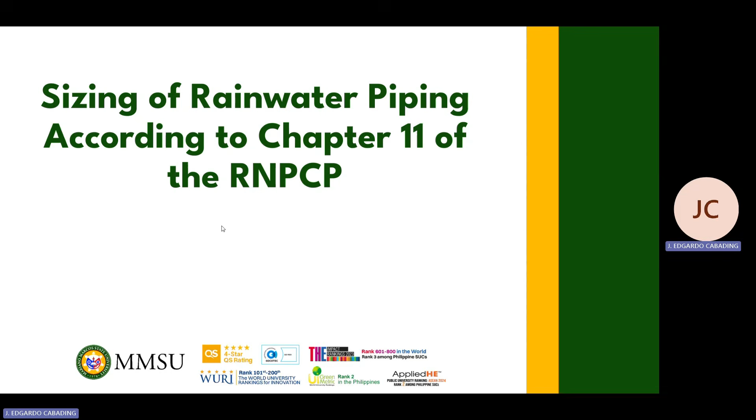So first, we will be sizing our gutters. Bago tayo makapag-size ng gutters, we have to first know the following: una is the horizontal projected roof area, pangalawa yung slope ng ikokonektahan yung gutter, and last is the rainfall intensity in millimeters per hour. And this is an important thing to take note of. Ang makukuha natin dito is the diameter of a semicircular bottom gutter.

Semicircular. Now, if you are to buy commercially available gutters, usually guys complicated yung mga profiles nila. So what you can do is compare the areas ng commercially available gutter at yung semicircular bottom gutter na nasa size natin dito. From that, pwede kang pumili ng size ng commercially available gutter.

Now let us proceed sa steps to determine the size of the gutter. Unang step, ano ba yung maximum horizontal projected roof area? Pero kailangan mo munang i-determine kung anong parte ba ng bubong yung sineserve ng isang gutter o section ng gutter. And this is dependent on the downspout tsaka yung direction ng slope ng gutter. Pero elaborate muna natin yung horizontal projected roof area.

Ang ibig sabihin nito, kumbaga tinitignan lang natin yung roof na parang flat siya. Kung ano man yung nakikita mo dyan, yun na yun. In reality guys, etong mga faces ng roof na to, pa-diagonal sila kasi nga may slope. Pero hindi na natin yan i-consider as such. Kung ano man yung slope ng mga bubong na to, wala na tayong paki doon.

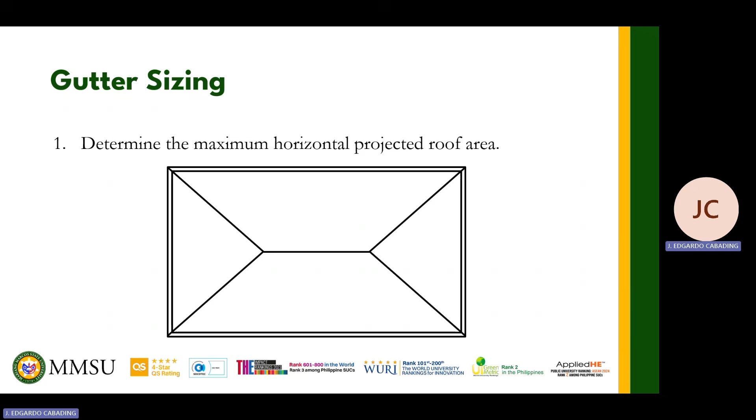Sana nagigets ha. Ngayon, punta naman tayo sa tributary area. Let's say for example, eto yung mga downspouts natin, at sabihin natin gusto kong isize etong section ng gutter na to. O sir, bakit ayan lang yung isa-size mo? O bakit hindi yung buong gutter sa side na yan?

Ganito kasi yan, yung gutter gusto ko siyang i-design in a way na it drains sa magkabilang downspout. Paano natin yan gagawin? E di hatiin natin yung buong gutter, di ba? Tapos sa gitna, dito guys, ayun yung pinakamataas na point ng gutter natin. Tapos mag-i-slope yung mga yan as such papunta sa mga respective downspouts na magde-drain sa kanila.

So dito sa section na to, ang pupunta na lang na tubig ulan is yung tubig ulan na nanggagaling dito. Okay? O therefore, ayan na yung tributary area natin. Tapos pwede mo nang kunin yung horizontal projected area niyan.

Now you have to do this guys for all sections of gutter. When we design, let's say katulad ng bubong na to yung dinedesign natin, wherein connected yung mga gutters natin, what we want to do is just get the largest size of gutter, and ayun na yung gagamitin natin for all gutter sections. Kahit na sa ibang section ng gutter na to, mas maliit yung nire-require niya. This is for ease of installation kasi.

Okay guys, sabi ko kanina, you have to consider every section of gutter, then get the tributary area for each. Then we will determine the maximum as stated sa step, yun kasi yung magbibigay ng pinakamalaking size ng gutter, and ayun na yung i-consider natin for the design.

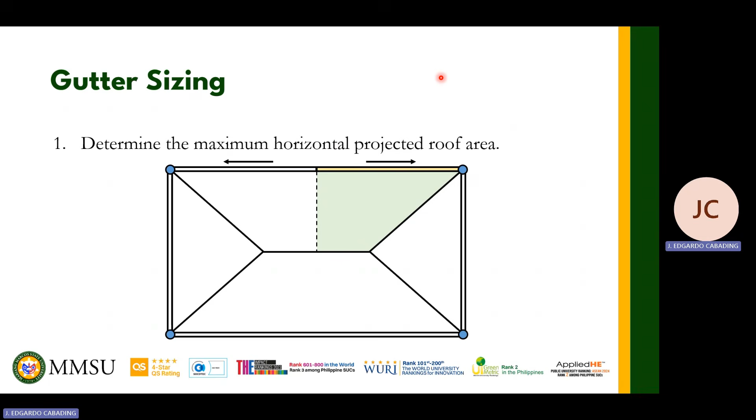So next is, i-determine natin yung rainfall intensity sa location ng structure, and you can acquire this data from PAGASA. Again guys, this should be in millimeters per hour. Ang sabi sa code, pagka daw yung structure is located in Manila tsaka mga karatig lugar, so you can use daw an intensity of 102 millimeters per hour for the design.

Sunod naman is the slope of the gutter. Ano yung i-consider mong slope pag kinabit na yung gutter? So we have here 4 slopes from 0.5 to 4%. Ito kasing apat na to guys, meron silang corresponding tables na gagamitin natin for sizing.

O sir, paano kung hindi exactly yung mga yan yung i-consider naming slope? Let's say yung gusto nyong slope is 1.5%, eh wala naman yan dyan, di ba?

Pero you still have to choose kasi which table to use based on these 4 slopes. So anong pipiliin mo pag 1.5%? Dapat sa 1% ka.

Okay guys, pababa ka dapat kasi that is the slope that will give you the safer size. Let me explain. Pag mas mataas yung slope natin, mas steep yung gutter, di ba? At pag mas steep yung gutter, mas mabilis yung flow ng tubig towards the downspout. Ibig sabihin, madaling mabakantehan yung gutter, at kaya niyang mag-receive ulit ng tubig. Since madali siyang mabakantehan, hindi mo kailangang lakihan yung size ng gutter.

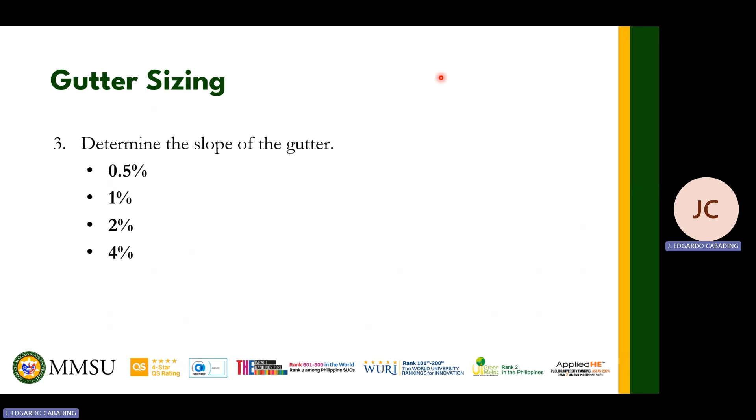So after niyan, pwede na tayong mag-size. Pwede tayong gumamit ng equations na to, and depende yung equations natin sa kung ano yung slope natin. When we size, we always choose the closest, not round up. So sa case na gagamitin mo itong equations na to, you will be choosing the closest size relative to the value na na-solve mo.

Or we can use the tables given here. Si table 11-3 and table 11-5, parang magkamukha lang yan. Check niyo na lang sa code, tapos verify niyo. Then, when we use the tables, we will not be rounding up. Hindi tayo pipili ng value na mas mataas sa kung ano yung meron tayo. Instead, we will be looking at the closest horizontal projected roof area value sa table relative sa horizontal projected roof area from the structure.

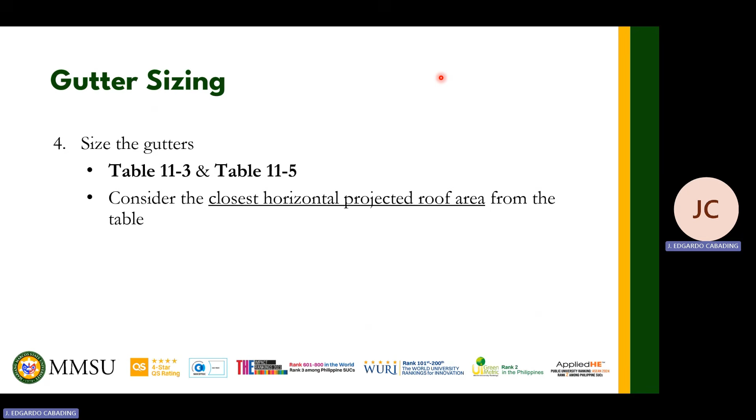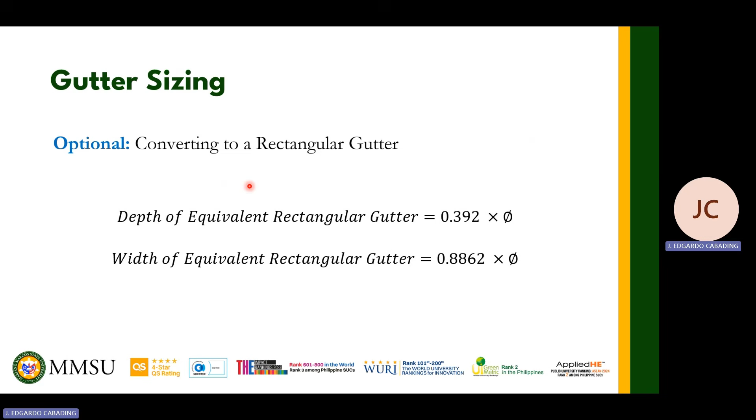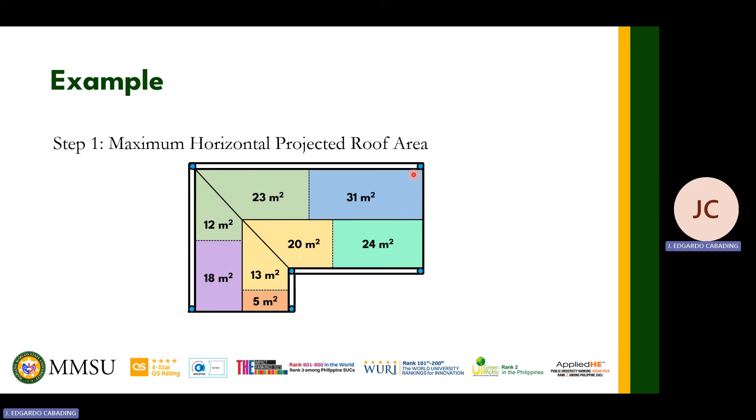Next is the rainfall intensity. According to the problem, the structure is located in Manila, therefore our rainfall intensity is 102 millimeters per hour. And then the slope of the gutter is 0.5%, which is also mentioned in the problem.

After that, we can now size our gutter, so we can get the diameter of the semicircular base gutter. Since our slope is 0.5%, we look at the table for the 0.5% slope. First, we pick the column to use. Since our rainfall intensity is 102, we use this column. And since our max horizontal projected roof area is 31 square meters, we use 33.4, since that's the closest.

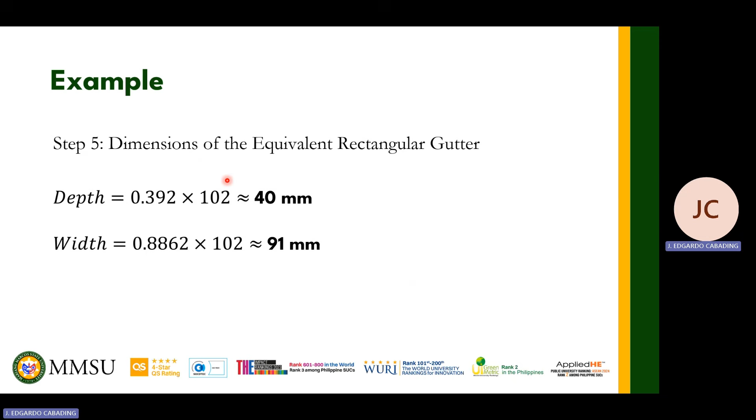Next, let's determine the dimensions of our rectangular gutter, since according to the problem, a rectangular gutter will be installed. To do that, we'll use our equations to solve for the width and depth. We round up so that the design is more conservative.

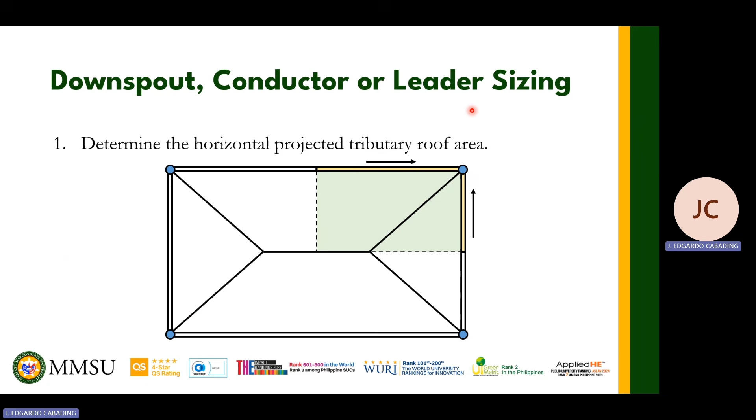Step 1: we determine the horizontal projected tributary roof area served by our downspouts. Like before, let's say these are our downspouts, and these sections of the gutter will drain to this downspout. So what part of the roof is served by the downspout? That's it, and from there you can get the horizontal projected roof area.

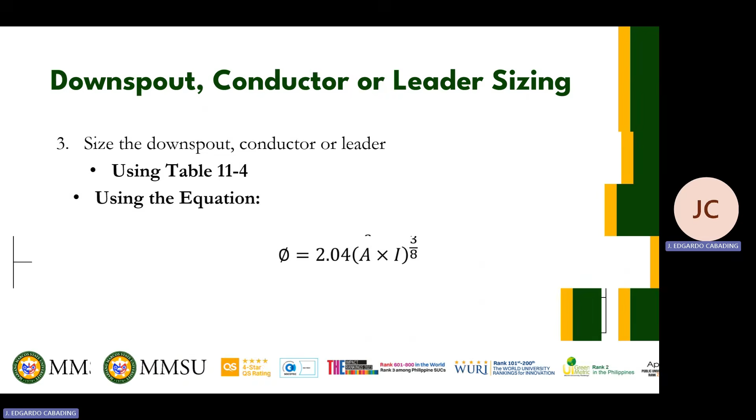Next is the rainfall intensity, similar to before. After that, we can size it using Table 11-4 or the given equation. We pick the closest value. This time we have 25 millimeters per hour rainfall intensity. If your rainfall intensity isn't in the table, do what we did before: multiply the roof area by 2, then divide by the rainfall intensity in inches per hour. Again, we'll look at 51 millimeters per hour. Let's answer the example.

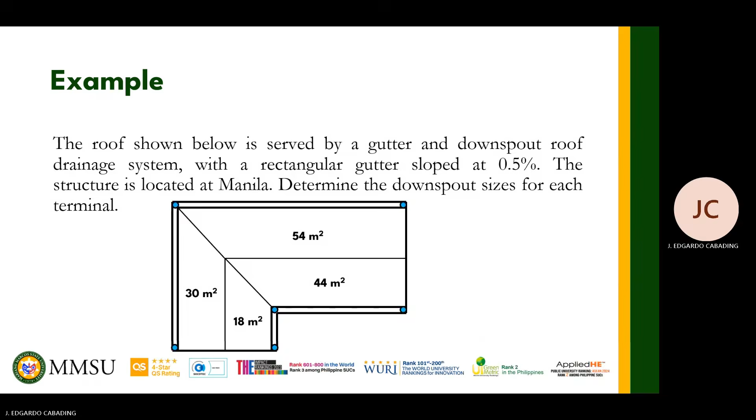For downspout sizing, you can size each downspout individually based on demand, but in practice you can also consider the largest downspout size and use that for all of them. The advantage is that since they're all the same, it reduces confusion for installers and helps with ease and convenience of installation. If you size individually, of course you save more since you're not oversizing everything. So for this example, let's just consider the downspout with the largest tributary area.

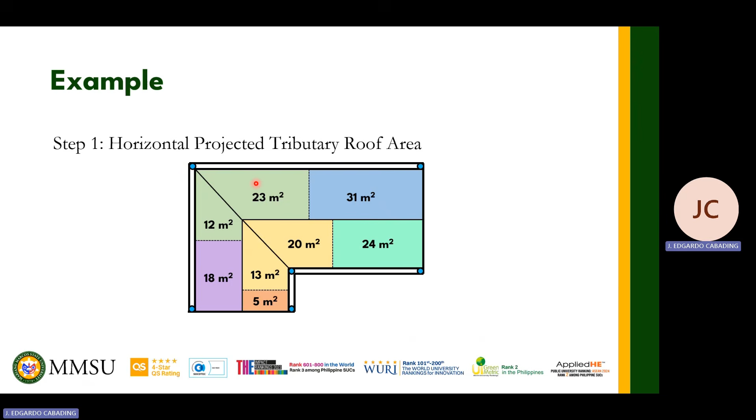Our rainfall intensity is 102 millimeters per hour from the problem, since the location is Manila. Now we can size the downspout using Table 11-4. Our rainfall intensity is 102, so we look at this column - wait, this column. Our area is 35, so we go to 101 since that's the closest value. We follow its row until we reach the size. So the size we get is 51 millimeters.

Let's proceed to our roof drain system. First let's size the roof drain. Similar to the downspout earlier, this is the preliminary information we need to size our roof drains. First step: we determine the horizontal projected tributary roof area.

Same as before, nothing new - you just have to ask yourself what area of the roof or roof deck drains into each roof drain. This depends on the design flow of water. For example, let's say we have a roof deck here, and we'll install 2 roof drains to serve this roof. As for the design flow of water collected there, we want the roof deck to drain equally on both roof drains. So this is the tributary area for the roof drain on the left, and this is for the roof drain on the right.

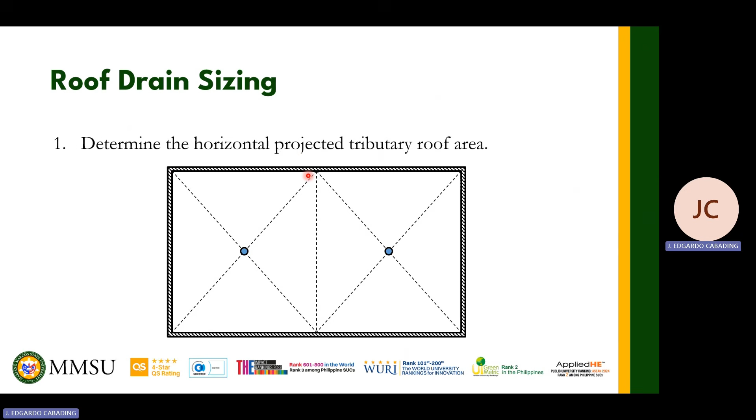We still need the rainfall intensity, same as before. After that, we can now size the roof drain. We just look at Table 11-4, or we can use this equation. This table we showed earlier - it's the same table we use for both the roof drain and the downspout.

So how about our vertical rainwater pipe? Dito, kasama na dito lahat-lahat ng natin vertical rainwater pipes, okay? Whether that may be the downspout na nasa labas or the leader na concealed sa loob. Basta ito yung vertical storm drain na pinagpapasahan ni roof drain ng kinokolekta niyang tubig ulan, okay?

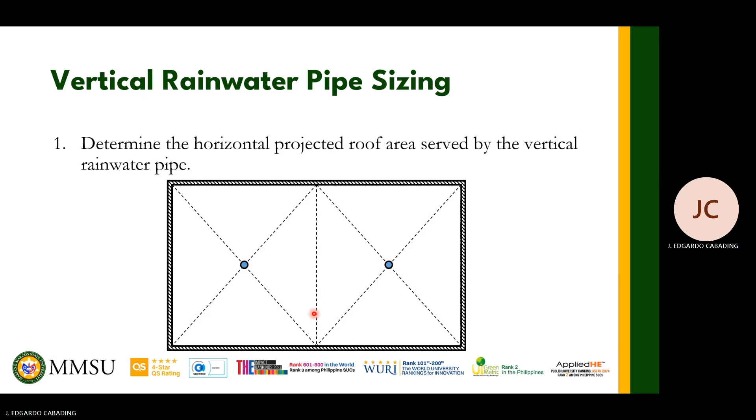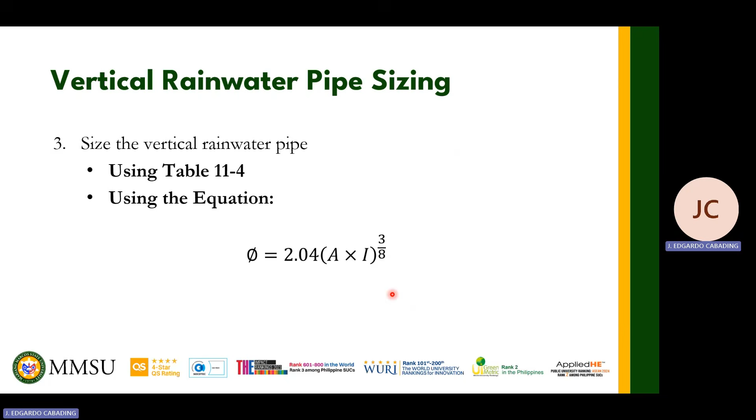Okay guys? Next, kailangan natin ng rainfall intensity, madali na lang yan. Then after that, we can now size our pipe using table 11-4 or this equation. Again, this table ay yung table lang din na pinakita ko kanina sa may downspout tsaka roof drain sizing. Pare-parehas lang sila ng table na gagamitin.

Okay guys? Last na isa-size natin is the horizontal rainwater piping. So yung dalawang to, di yan mawawala sa mga kakailanganin natin, no? In addition to these two, kailangan din natin ng slope ng horizontal rainwater pipe natin, katulad dun sa may gutter. So unang step natin guys is to determine the horizontal projected roof area served by the horizontal rainwater pipe.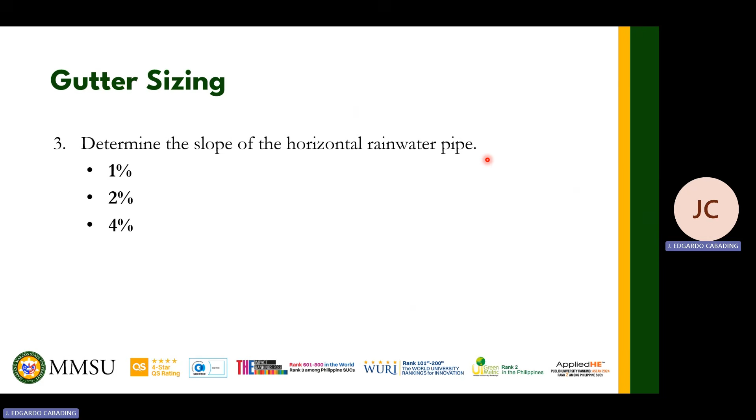And again, if in the case na yung slope nyo is not among these three, sabihin natin in between any of these, mas mababa tayo na slope ha. Okay guys? Again if 1.5% for example yung slope nyo, dapat sa 1% slope tayo. Ayun yung gagamitin dapat natin for the design. Nagigets ha? After that, we can now size the horizontal rainwater pipe, so you can use these equations depende sa slope na i-consider.

Now, let us solve a problem. So size naman tayo guys ng roof drain system. Sabi dito, a structure is served by a roof drain system. Based on the provided roofing plan and diagram, and considering a rainfall intensity of 127 millimeters per hour, i-determine natin yung sizes for the roof drains, the horizontal rainwater pipes, and vertical rainwater pipes. Lahat daw ng horizontal rainwater pipe guys is sloped at 2%.

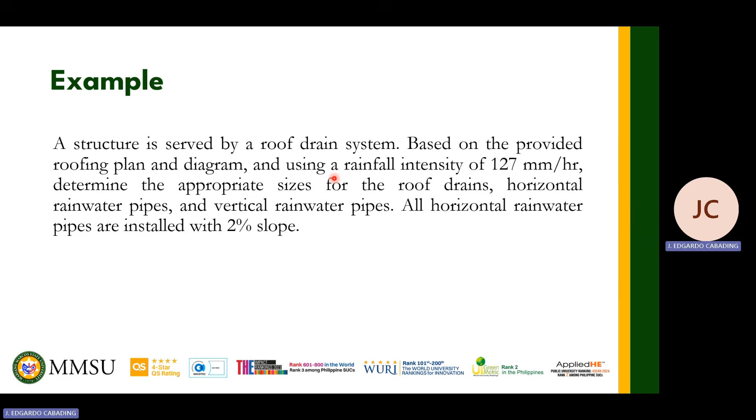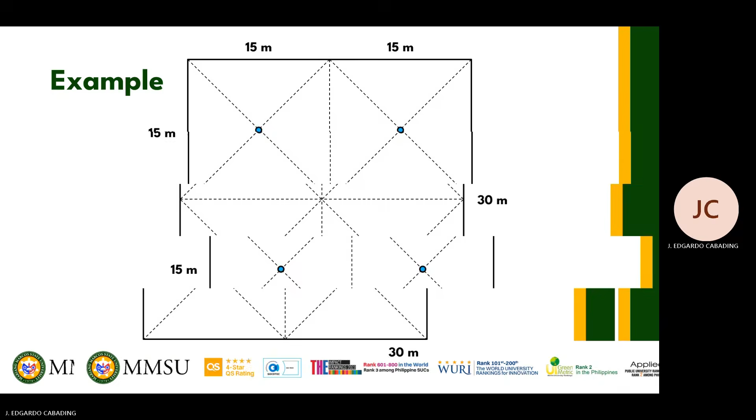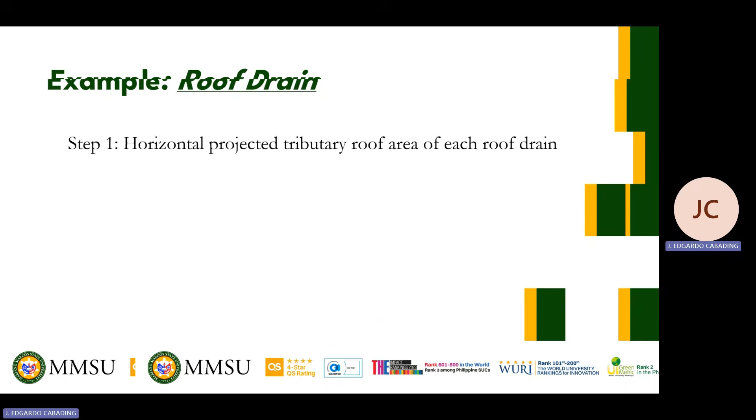So unang step guys, kunin natin yung horizontal projected tributary roof area ng bawat roof drain. Since pare-parehas naman yung tributary area ng lahat ng roof drains natin dito, edi parehas din yung magiging sizes nila, kahit isa na lang i-consider natin dito, okay lang yon. Sa upper left na lang tayo tumingin, ayun yung tributary area niyan. So that is 15 times 15, and that is 225 square meters.

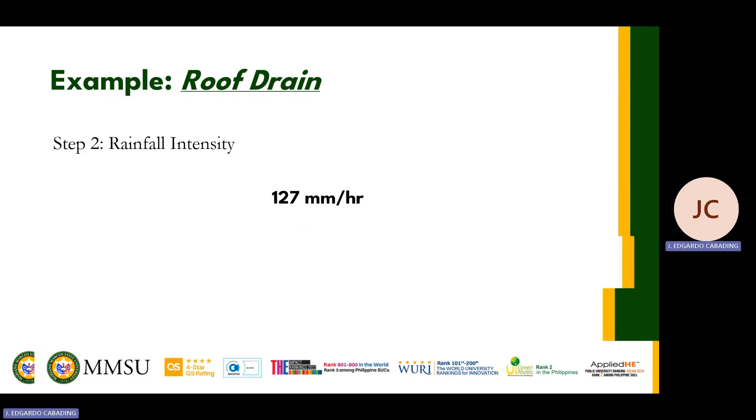Next, size naman natin yung horizontal rainwater pipes natin. Tingin tayo sa diagram, etong mga pipes na to yung isa-size natin dito. Pangalanan na lang natin sila: this is pipe 1, this is pipe 2, this is pipe 3, and this is pipe 4.

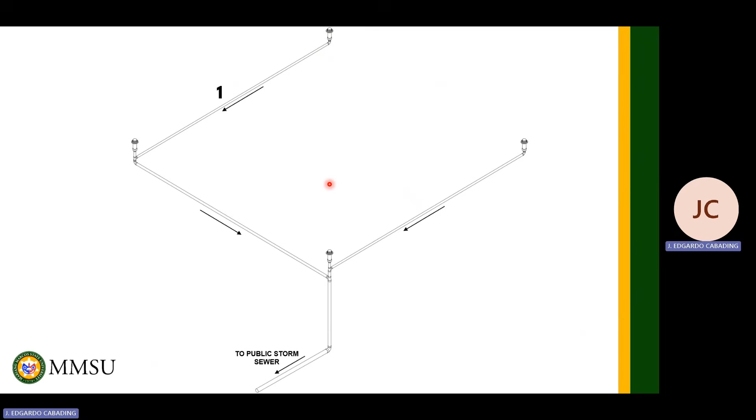Step 1, kukunin natin yung horizontal projected roof area served by each horizontal rainwater pipe. Tingin muna tayo sa pipe 1, ano yung isa-serve niya? Di ba yung dumadaan na tubig ulan dito sa pipe 1 is yung nanggagaling lang dito sa roof drain na to. Ibig sabihin, kung ano man yung area na sinaserve ng roof drain na to, ayan din yung isa-serve nung pipe 1. Eto lang yan guys, this is 225 square meters.

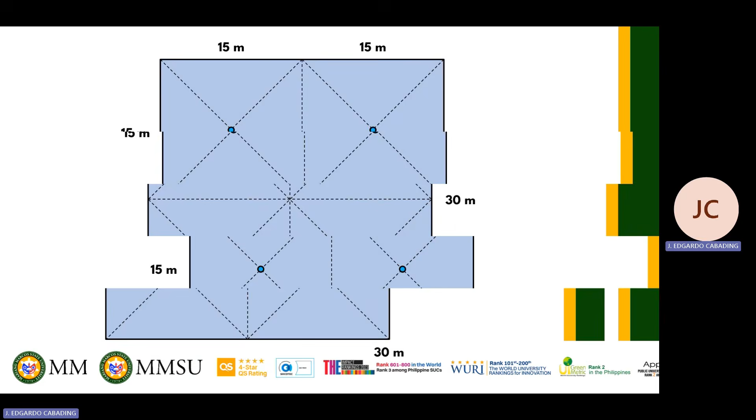Step 2, rainfall intensity, that is 127 millimeters per hour. Then step 3 is yung slope. Sabi sa problem, slope daw at 2% lahat ng horizontal rainwater pipe natin. After nating ma-determine lahat yan, we can now size the pipes.

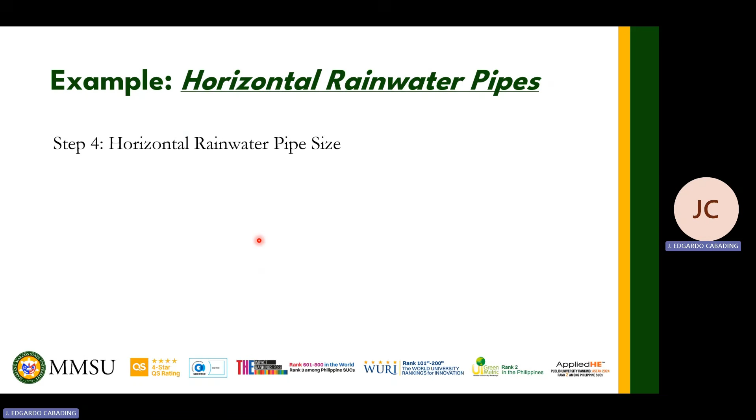Therefore, ang size natin is 203 millimeters para sa pipe na to. Okay guys, so ito yung summary ng pipe sizes natin. Ayan, okay, so yun na yung gagamitin yung sizes para dun sa may system natin.

Last size naman natin yung vertical rainwater pipes natin. So ito yung isa size natin, guys. Pangalanan na lang ulit natin silang pipe 1 and pipe 2. So step 1 tayo, let's determine the horizontal projected roof area served by both of these vertical pipes.

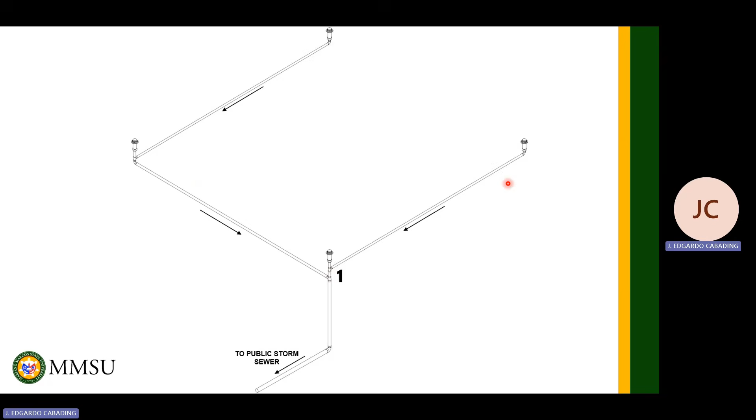Unahin natin si 1. Itong maliit na pipe section dito, saan galing yung dumadaan na tubig ulan dito, guys? Sa roof drain na to, tsaka sa roof drain na to. Therefore, ang area na sinaserve niyan is yung area na sinaserve ng dalawang roof drains natin. Eto siya, okay, so that is 450 square meters.

For pipe 2 naman, yung tubig na dumadaan sa kanya comes from all roof drains. Ibig sabihin, sinaserve niya yung buong bubong or roof deck, so that is 900 square meters. So ito yung summary ng areas natin, guys.

Step 2 is the rainfall intensity. So from the problem, that is again 127 millimeters per hour. After nyan, size na tayo, dito tayo sa table na to titingin. Unang gagawin, tingin tayo ng column na gagamitin, and that is based on the rainfall intensity. Since 127 yung rainfall intensity natin, ibig sabihin, dito tayo sa column na to.

Okay, and then refer naman tayo sa areas para ma-size natin yung pipes. So yung pipe 1, meron siyang area na, ano, ilan yung area natin? 450, no? So meron tayong area na 450, yung pinakamalapit sa kanya, guys, is 467. Tama? Therefore, ang size ng pipe 1 is 127.

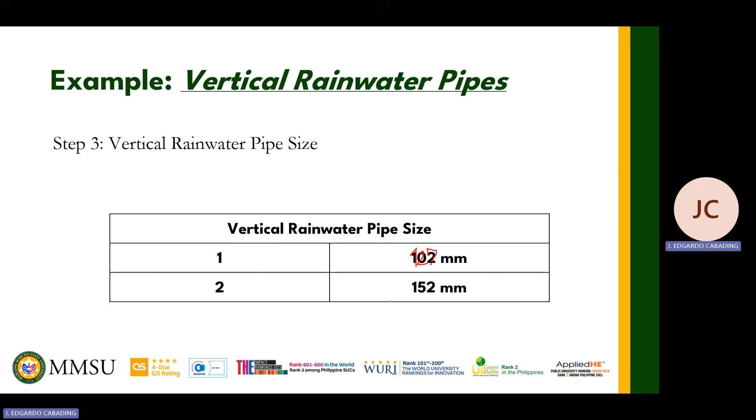Ay, nagkamali ako dito, no? Dapat ano to, dapat 127. Check nyo na lang, sige, sulatan ko na lang. So this should be 127. Okay, kasi 450 yung area for pipe 1.

Last topic natin is sizing of rainwater piping considering side walls. So rain hits the walls, do your pipes know daw ba? Ibig sabihin kasi nito, guys, aside from the roof, yung wall nangongolekta din ng tubig yan, especially if adjacent siya sa isang bubong, no?

So expect na the effect of walls generally is papalakihin nila yung pipes. Okay, so the process, guys, stays the same, yung pag-size ganun pa din, the same procedure lang. Ang magbabago lang dito is yung area na i-consider when sizing, kasi nga, gaya ng sabi ko, nadadagdagan tayo ng surface na sasalo sa ulan aside from the roof.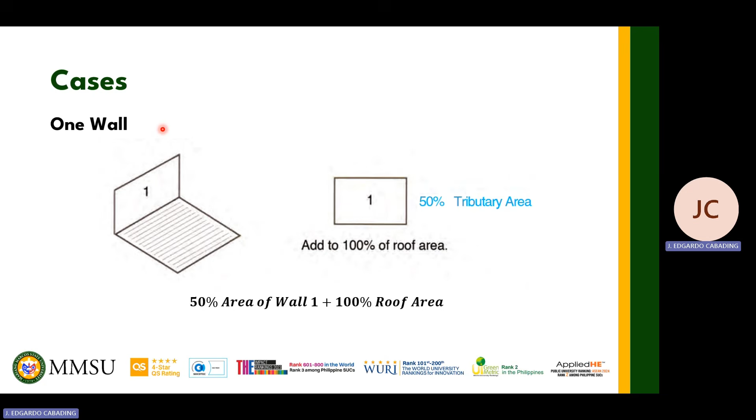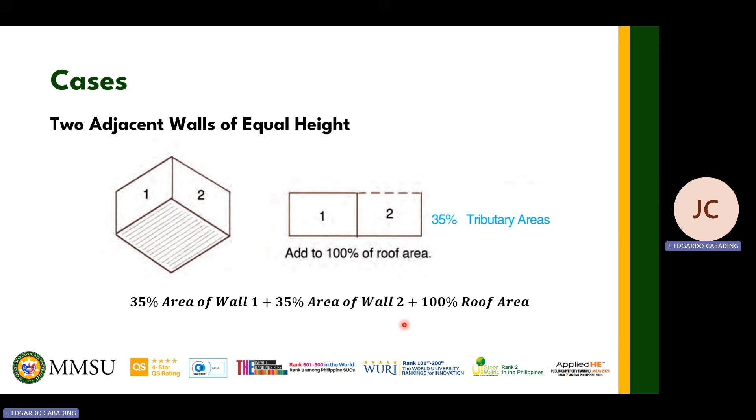Okay, pag naman meron tayong two adjacent walls of the same height, kukunin natin yung 35% ng area of both walls, then i-add natin yan sa horizontal projected roof area. Okay guys, pag naman two adjacent walls of unequal heights, pwede natin tong tignan as a combination of the two previous cases.

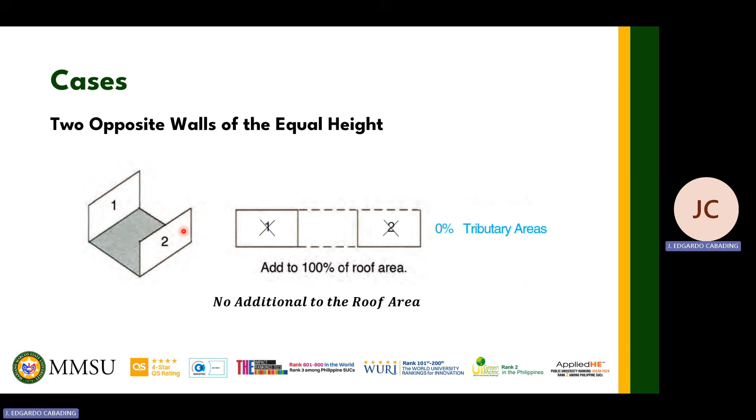For opposite walls of unequal height, we can look at this as a combination of two cases: opposite walls of equal height, and one wall. So we divide it into sections - wall 1 and 2A are opposite walls of equal height, and the remaining wall 2B is considered as one wall. We need to consider the rainwater it will catch, so we add 50% of wall 2B's area to our roof area.

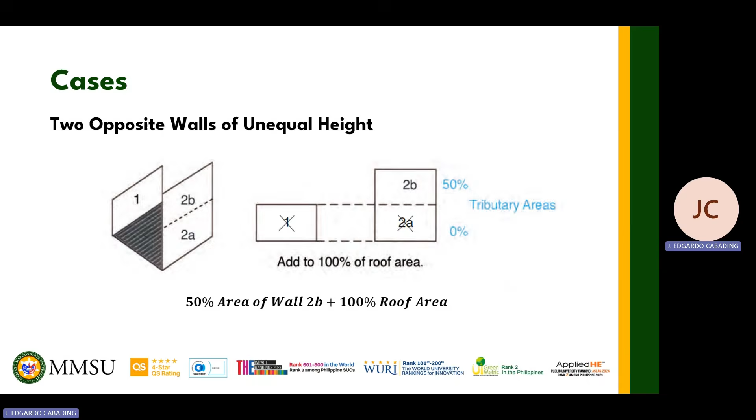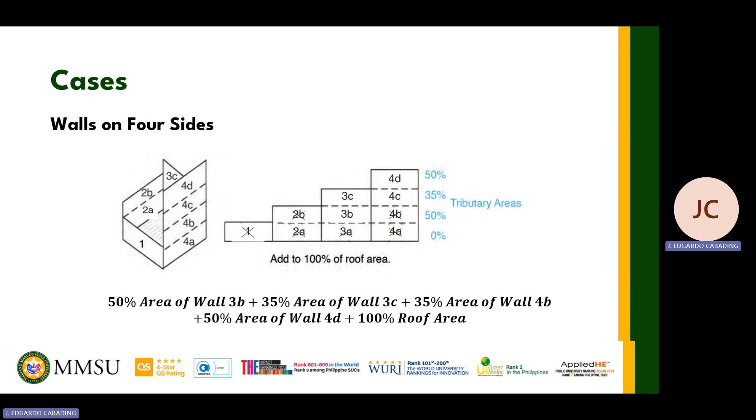Okay guys, let's do an example. A factory located in Metro Manila has a sawtooth roof design. Determine the sizes of the gutters and downspouts. Assume a gutter slope of 1% and downspouts installed at the front and back.

So this is the elevation of our structure. This is the length of our wall, or the height. This is 4 meters.

And these are our dimensions from the plan view. This is 10 meters, and this is 20 meters. We'll be placing a downspout here in front and here at the back.

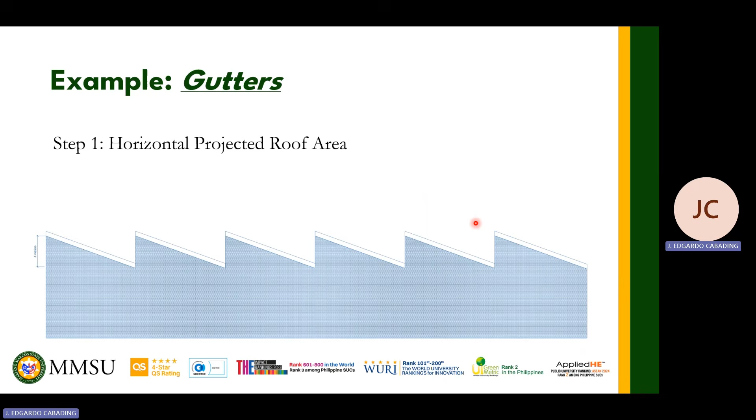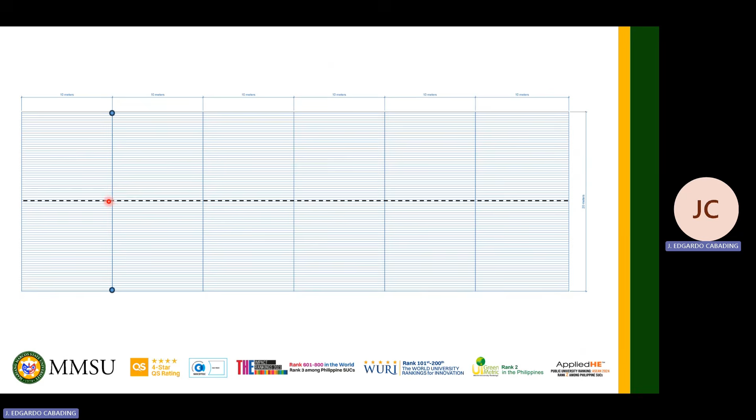We will have downspouts in front and at the back. So we'll divide it such that the gutter section here drains here, and this one drains here. So the lengths for both sections will be 10 meters each, since we divided the 20 meters. The size for this one will be the same as the size here.

Since they're symmetrical, we'll just consider one of them. So the tributary area for the gutter here - let's look at this. The tributary area is this, so that's 10 times 10, equal to 100 square meters.

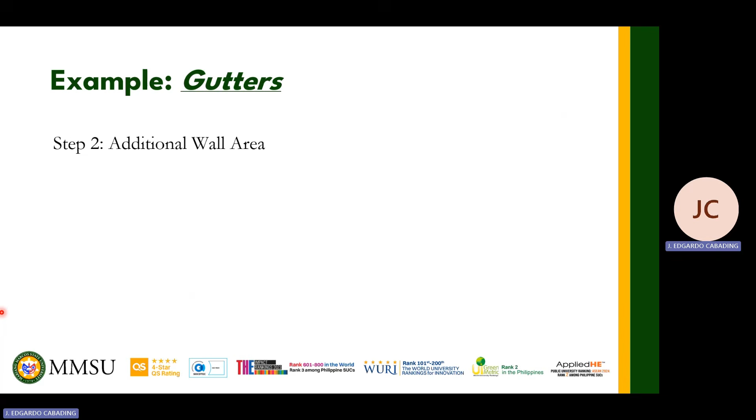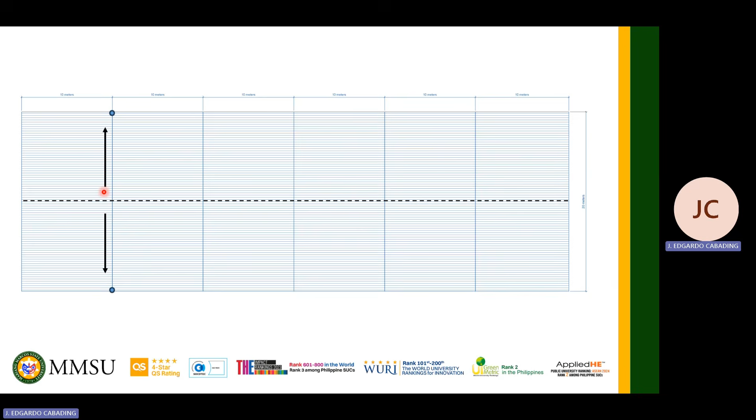Step 2, we take the additional wall area, since we have walls adjacent to the roof. What's the area of this wall? The length here is 10 meters, and from the elevation view, the height of the wall is 4 meters. Therefore, the area of this wall is 40 square meters.

So to get the total area, we add 50% of this wall area to our horizontal projected roof area. That's 100 plus 50% of 40, which equals 120 square meters.

Next is the rainfall intensity. Since it's Manila, the rainfall intensity is 102 millimeters per hour. Next, we determine the gutter slope, which is given in the problem as 1%.

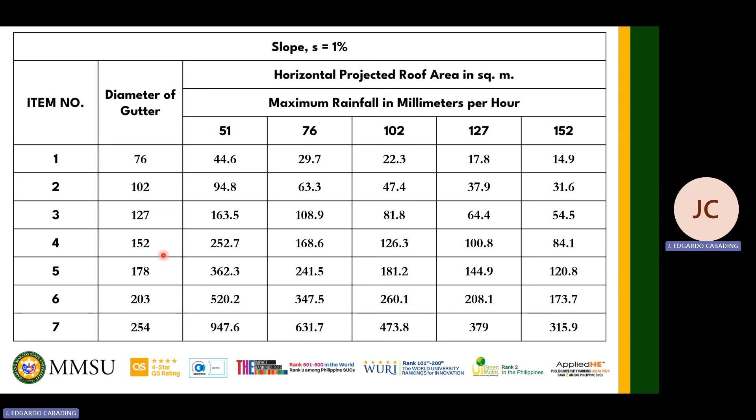After that, we can size the gutter. Here's the table we'll use. 102 is our rainfall intensity, so we go to this column. Our area is 120, and the closest value is 126.3. Therefore, the resulting size is 152.